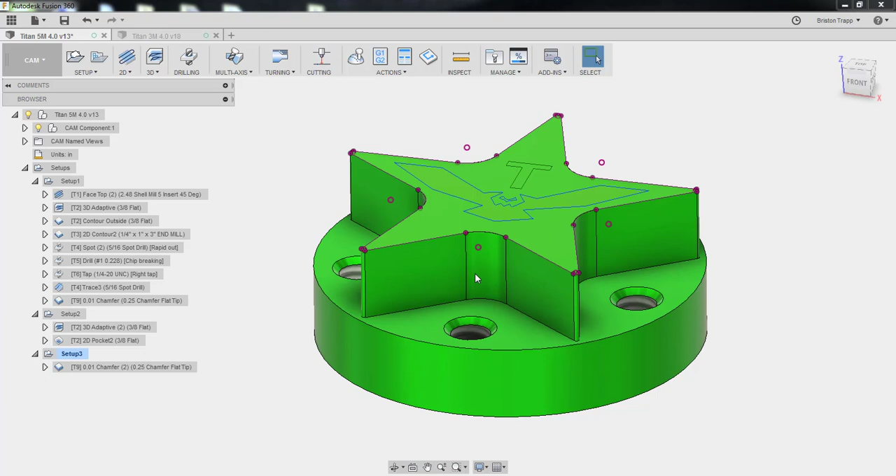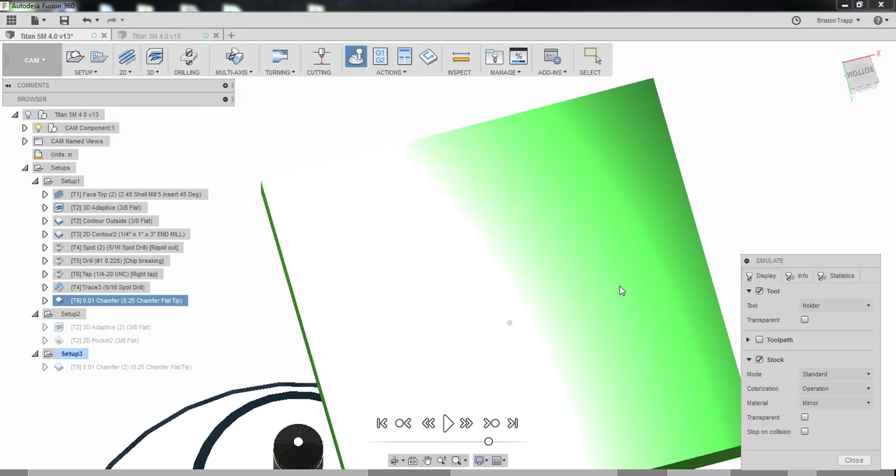This video is for the CAM operations for Titan building block 5M, setup 2 and 3. Previously, we ran setup 1, and now we need to remove the carrier and chamfer our part.

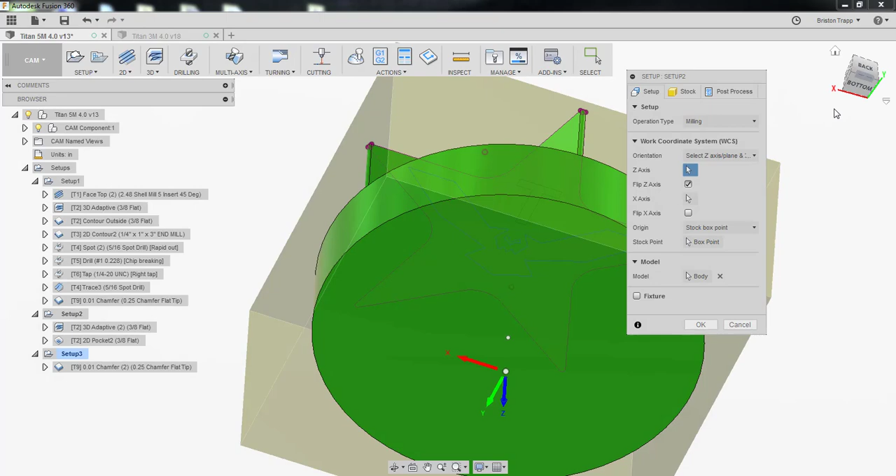Your second setup is going to be upside down. Stock is going to be 2.05 in the X, 2 in the Y. The Z is actually going to be 0.970. That's the 1 inch minus the 30 thousandths from setup 1.

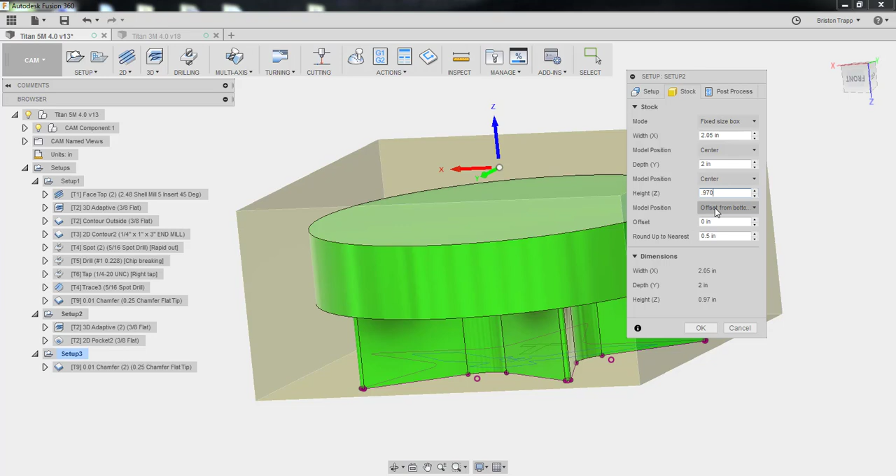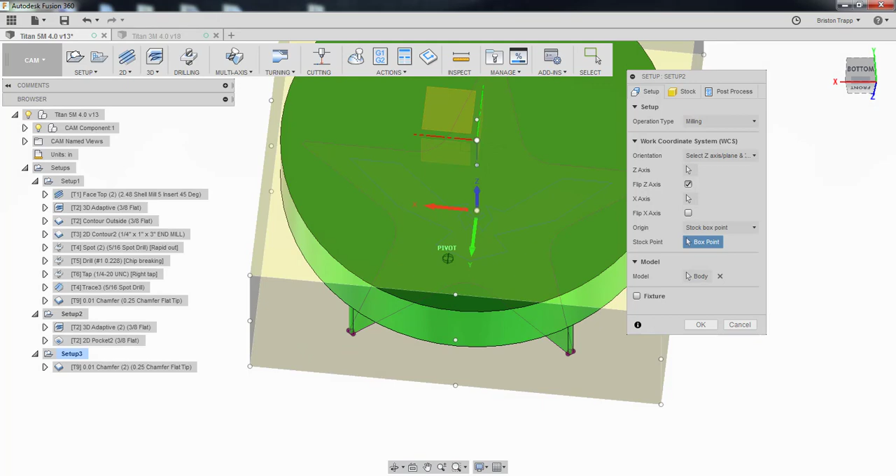We want to make sure our offset from the bottom is 0 because we're going to push it all the way down to the bottom, and our work coordinate system is going to be box point, bottom, center. Flip that around, there we go. So bottom, center, X to the right, Y forward, Z up. Going to probe the bottom of the soft jaws that are already made.

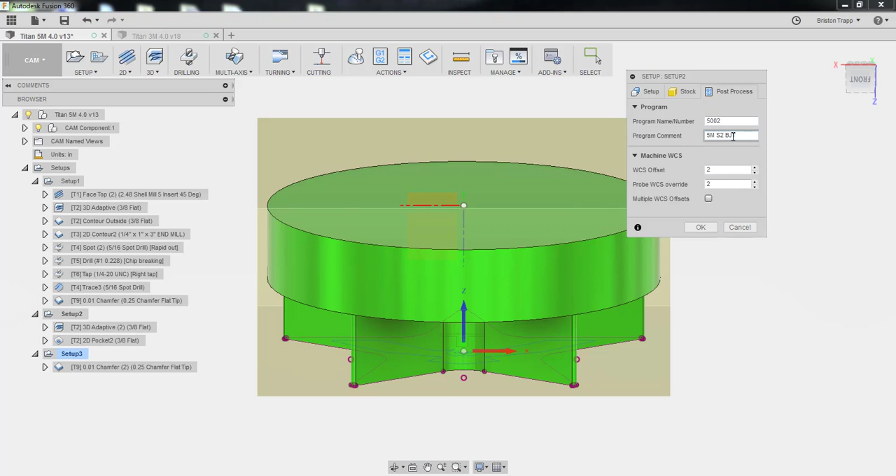Stock 2.05 by 2 by 970 thousandths. Post processor is going to be 5002 for the program name. Comment, and we're going to use work offset number 2 for G55.

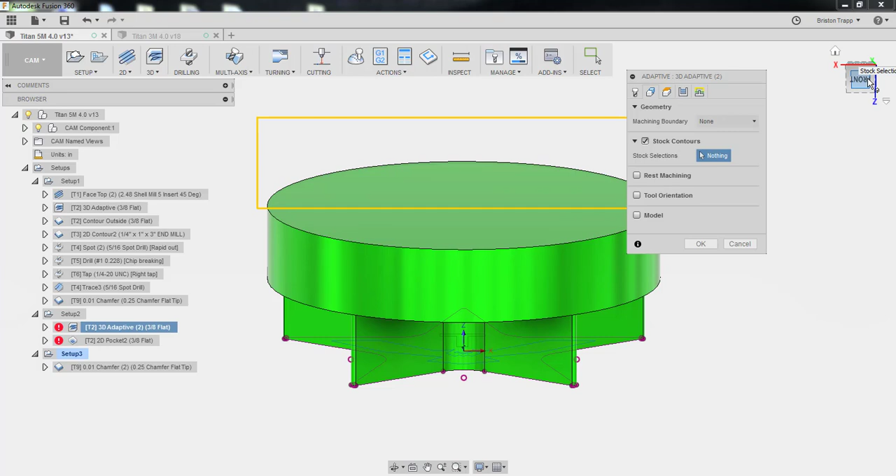To remove the carrier, we're going to do an adaptive toolpath, 2D or 3D, doesn't really matter, at 6,000 RPM with our 3/8 inch flat end mill. Cutting feed rate 108 inches a minute, resulting in 6 thou feed per tooth, plunging at 30 inches a minute. Geometry is going to be stock contours. Heights, pretty much standard. Bottom height's going to be model top.

Passes, tolerance 4 thousandths, optimal load 80 thousandths, minimum cutting radius 20 thousandths. Actually don't need that checked. Climb milling, we got a maximum roughing step down of 800 thousandths. Fine step down 80 thousandths, really doesn't even matter. Stock to leave, we're going to leave 10 thou in the axial direction, and smoothing is going to be on at 2 thousandths. Linking, this should be fine as is.

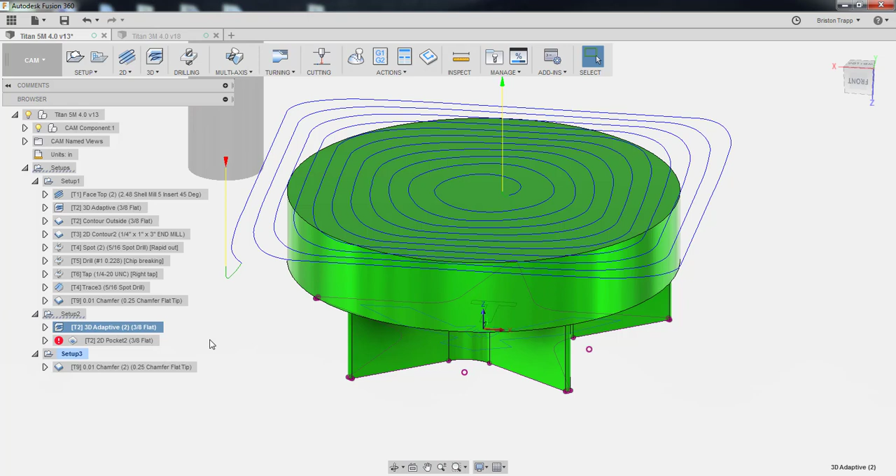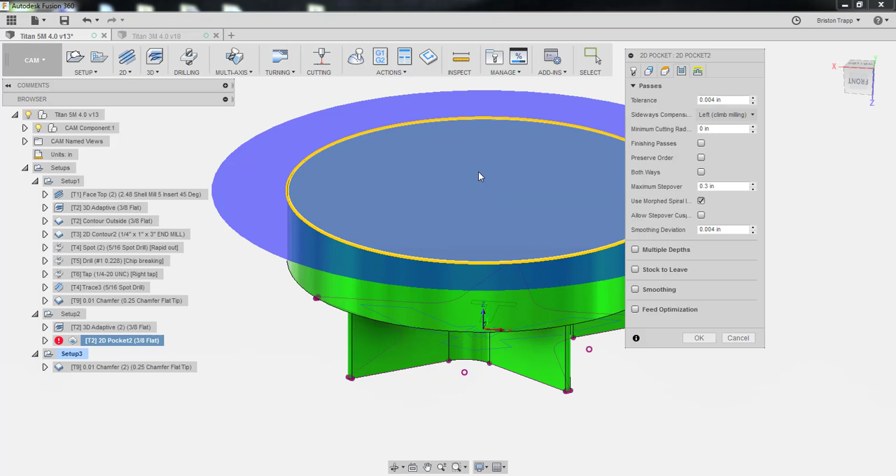Stock contour is going to be outside. Let me just deselect that so you can actually see what's going on. Geometry, right there. Stock contours is going to be that edge. Heights, that's fine. Tolerance 4 thousandths. All this should be fine. I did reduce the step over a little bit. Use morph spiral. This will, I think, start from the center and work our way out. And we want to make sure that we're plunging. We do not need to do a helical ramp.

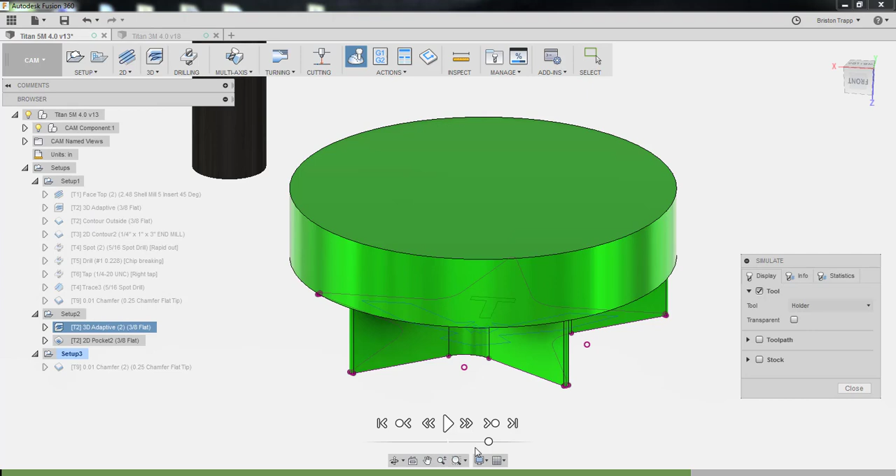So our tool should just spiral in and then do a pocket for the finish pass.

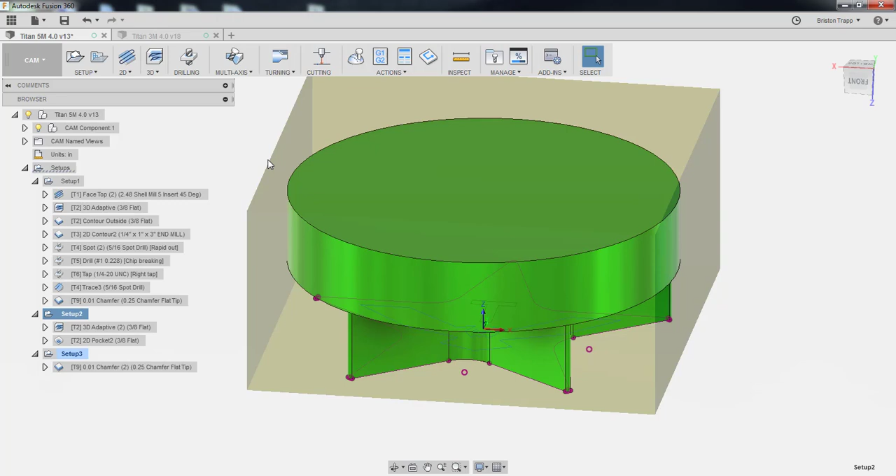The reason we are not chamfering in setup 2 is because we do not have the exact center location of our model, of our part. We have the center of the stock, but because we probed off of the side, the center of the stock might not actually match up with the center of our model. So we're going to do a third setup, setup number 3.

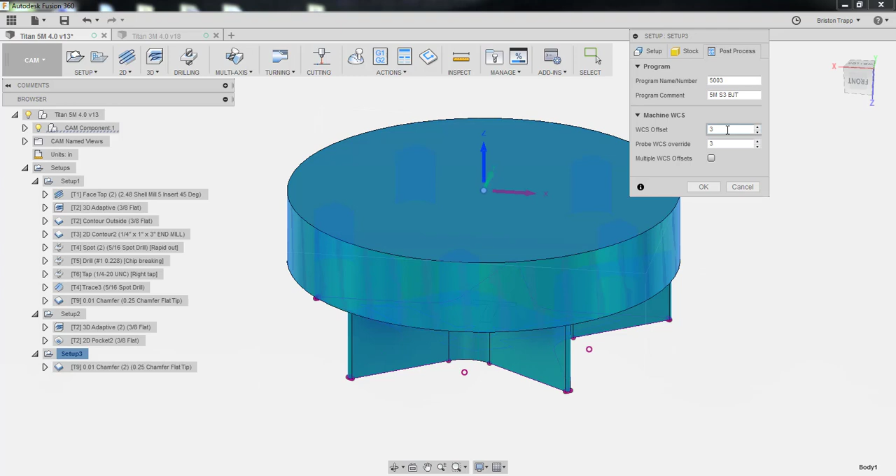The stock is going to be, instead of fixed size box, it's going to be from solid, and you click on your solid. Our post process tab is going to be 5003. We're going to use number 3. That will be G56 for our work offset. Setup is going to be a work coordinate of top center of our model, because we'll be able to probe this cylinder and get the exact center so our chamfer will be correct.

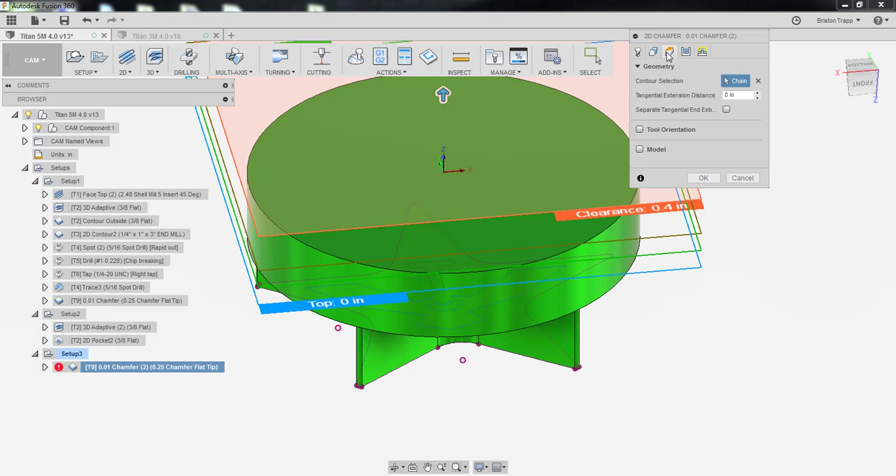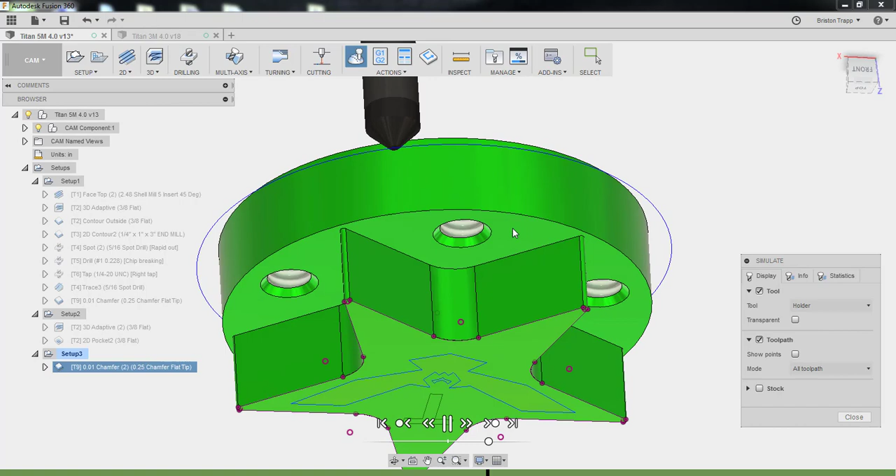Okay, typical 10 thou chamfer, 4000 RPM, 50 inches a minute, geometry. All this should be the same. Click OK. Check this simulation. Drop right down. On this one, actually, if we look at it again, since we're not chamfering in a very tight area, we don't need to chamfer right here. We can scoot this up a bit, so I'm going to go back and close that.

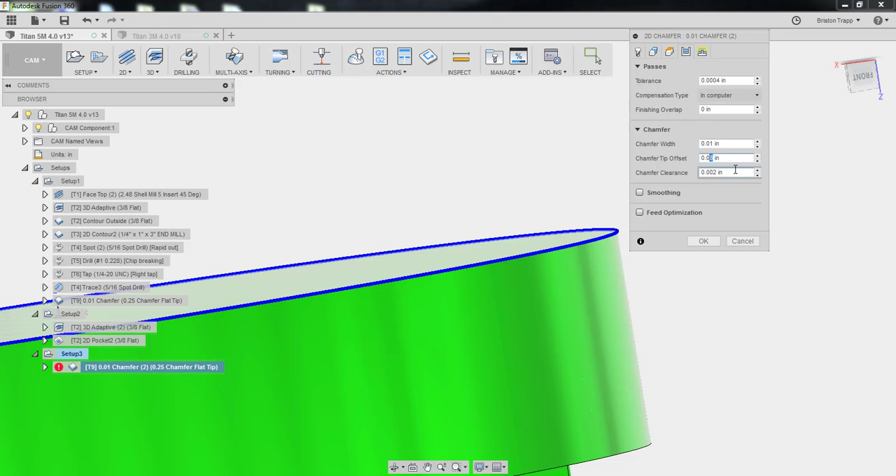We also don't want to run into our soft jaws, so under tip offset, I'm going to change that from 0.08 to 0.02. And now when we run our simulation, it should be no more down at the bottom. This will also spread out the wear on our chamfer mill, so we're not milling in the exact same spot.

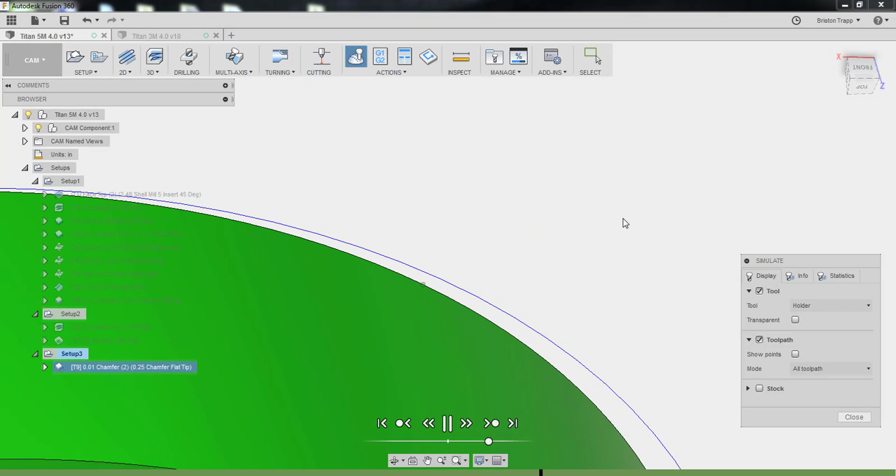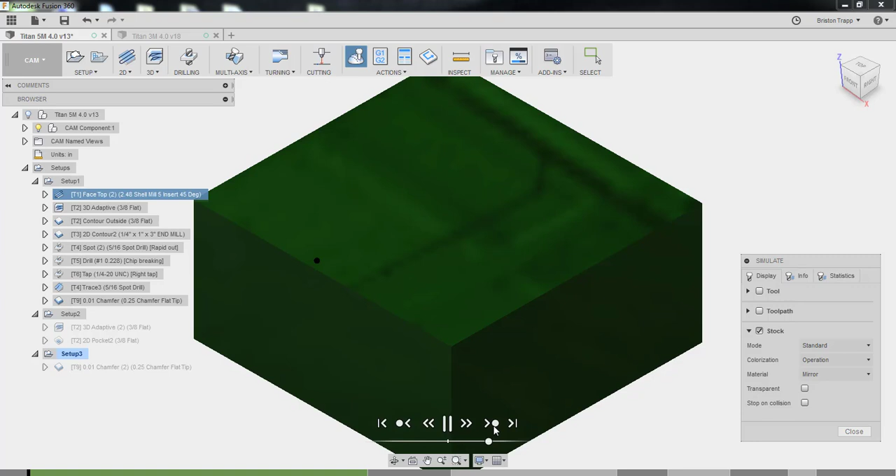Close. I'm going to go ahead and simulate everything. Turn off the model. Simulate. Turn on my stock. I don't really care about the tool path. And turn off the tool. Simulate. We've already done this before. You can fast forward. You can pause and kind of scrub back and forth, left to right. You can also drag on the timeline down here to speed it up, slow it down, pause.

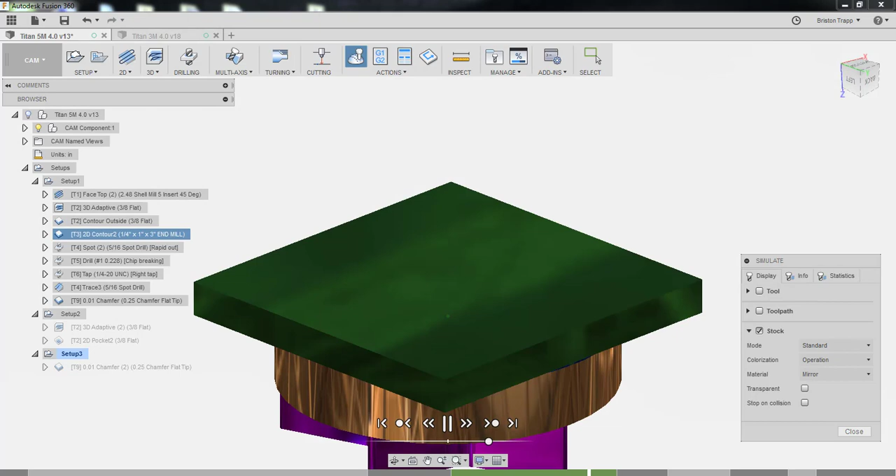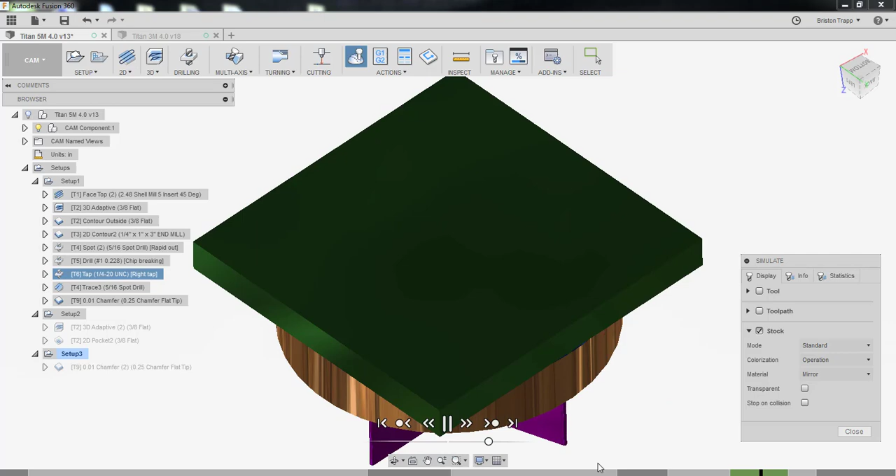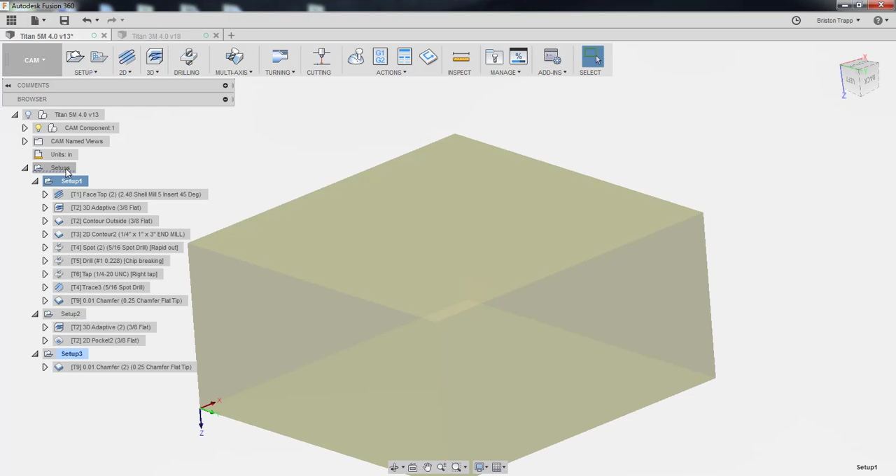Flip this over. Oh, that was a waste of time. I only simulated that setup. You need to make sure you simulate all of it, the entire setups.

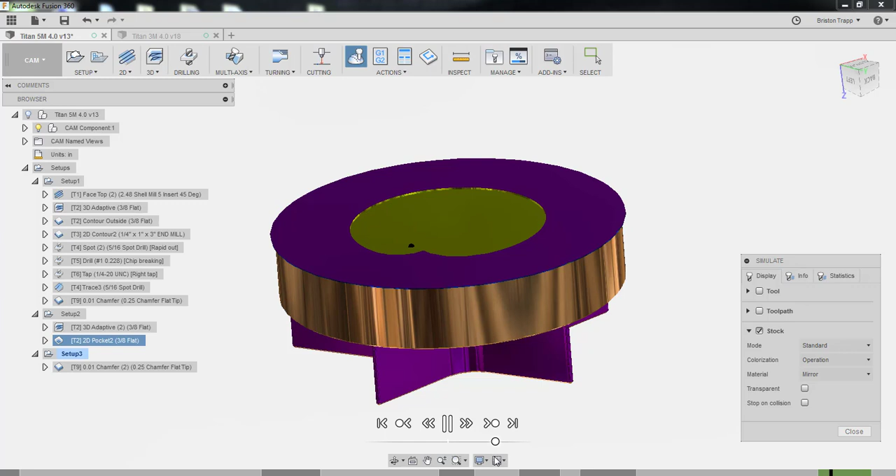Also, just click right here and jump straight to that operation. Chamfer, there we go. There's our 3D adaptive. There's our 2D pocket. And then here's our G56 setup 3 for the chamfer. Close. Check your tool numbers.

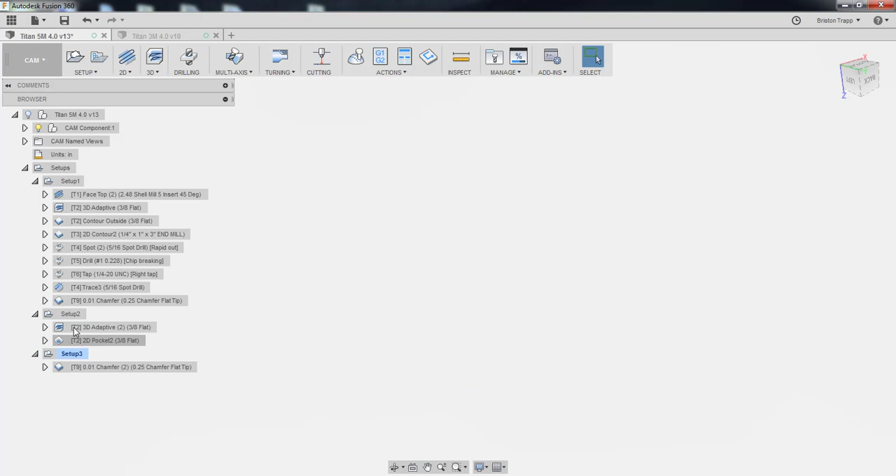You're going to post-process each one of these individually so you can set your work offset for setup 2, get rid of the carrier, and then probe your cylinder to set your work offset for setup 3. That is it for Titan 5M.